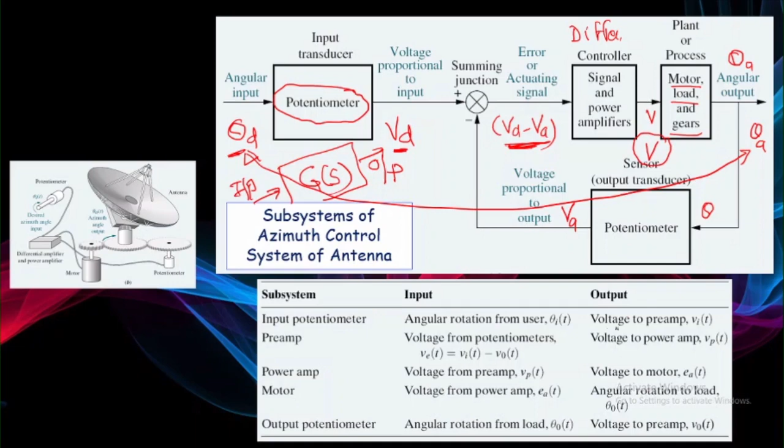These are the input parameters for it, and this is the output parameters. But now if you put these equations, this is nothing but an equation for your potentiometer, this equation for your preamplifier, this is for power amplifier - you can just observe these equations. This is nothing but a representation of the behavior mathematically of your particular subsystem. And this is a motor load or something.

Here you can say it is second order because it is S into S, which becomes second order; this one is first order. This is a simple constant and kind of things. So we got so many blocks into this.

Obviously these blocks need to be clubbed together to know the relation between the actual angle change and the input change. If my overall transfer function of the system is 1, it is a perfect system, I can say, but in actual practice this doesn't happen at all.

So here you can observe the individual blocks: this is one equation, this is another equation, this is a third equation, and one more equation like this. These equations should be clubbed into a single equation, and that is what is called block diagram reduction. We do block diagram reduction.

This reduction has one most important rule: that signal strength should not change at any moment of time. That is basically the intention for it, and we can do this in a step-by-step process. We get only one single transfer function which represents the behavior of the entire antenna, starting at the input potentiometer to the sensing potentiometer. This gives the output signal, and this is my input signal - the relation between these two is represented.

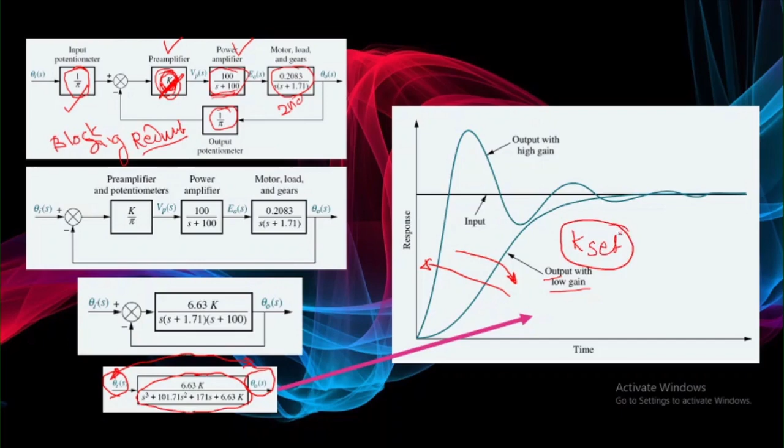If I increase the value of k, that is a gain value I can say, my system is going to perform in this fashion. And if I reduce this, my system will behave this other way. So whichever desired response you want, based on that you can set your k value, and that is nothing but your control parameter, which is going to give me perfect control onto the system.

That is the reason control system, or mechatronics, has importance, and its analysis is most important, because in this analysis everybody's contribution plays a very important role. Motor contribution is there, gear contribution is there, power amplifier contribution is there - each and everyone is contributing. If any of this fails, your system is going to fail. So that is one case study for this.

Similarly, if you look into another case study, there are free swimming submersible vehicles, which are unmanned - no one is there to control that part. In that particular vehicle, the depth of the vehicle is to be controlled. How is it to be controlled?

If you imagine your submersible vehicle, this is my liquid level and this is my submersible, it is moving further, and when I want to go into the deep, this is my desired actual signal, and I want to now move that submersible to the lower side.

What do I have to do? I have to rotate this particular submersible about a certain axis, and that is called the pitch axis, which occurs during forward motion via the elevator surface.

This elevator surface on the vehicle is to be deflected by a certain selected amount, and then it will go and deep dive into the liquid. The angular deformation caused by this deflection will cause rotation about the pitch axis, and that pitch axis will go into the disc.

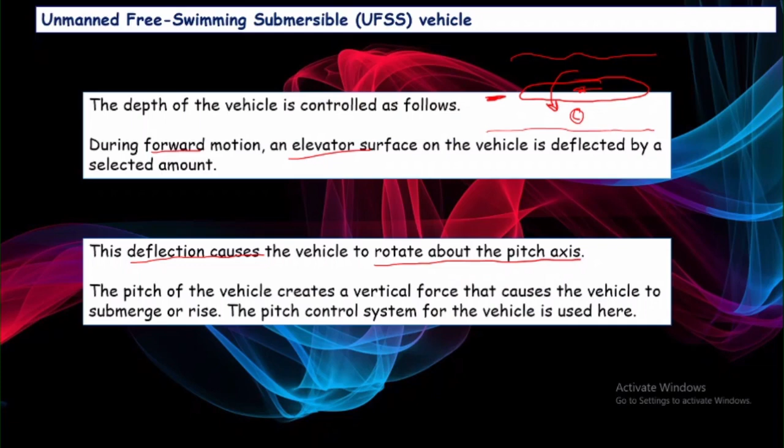For that purpose, we need a certain block diagram representation. Let's look at the test case for this. This is a submersible, and here it is a rudder.

This is called a rudder, and it is to be deflected such that it causes the vehicle to dip down or rise up, whichever altitude is desired. If you want to go up, it will take this angle.

So if you look into this, this is nothing but a heading command we are going to generate. This heading gain is one gain you are going to tune up, and then there is an actuator. The rudder actuator has a mathematical equation like this.

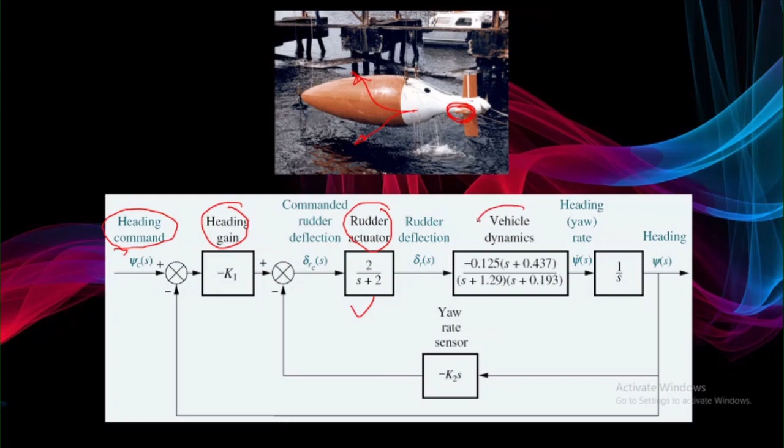Then this is the vehicle dynamics, which plays an important role because it involves its own inertia, its own stiffness, and so many parameters.

So in the vehicle dynamics, you may remember there is a signal convention: the Laplace of a derivative d by dt has value s, and if I have to integrate it, the Laplace of integration will result in 1 upon s.

This tells me the rate, or derivative, of that particular signal. But I want an angle, so we take 1 by s multiplication, which results in the integration of it, giving an angle.

So this gives only the rate of change of angular motion. This will give only the rate of change of angle, and that is what an angle is going to tell you.

And here again you are going to take a derivative, so it will determine a rate here. This is an angle given as input, and this is going to give me a change in the angle, or rate of change of angle.

So in this way you can look into these blocks, and each and every block is contributing to the performance of your system. Ultimately your aim is to connect these two elements, the starting point and end point, and each one contributes to the performance of your system.

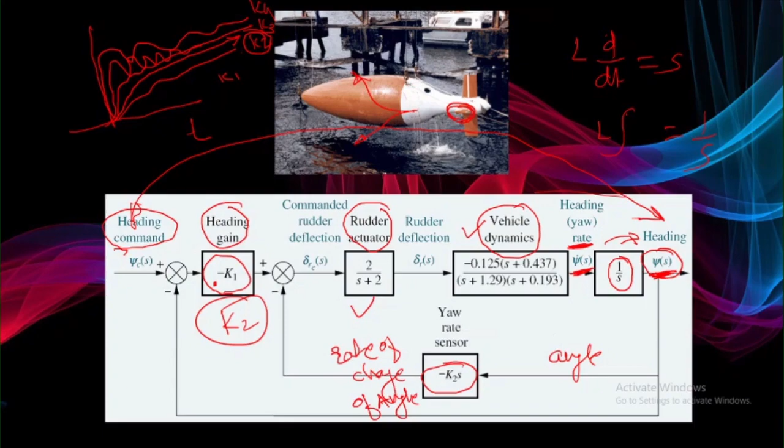So this is the way a control system is to be designed. In a similar fashion, you can have a space shuttle pitch control system, since we now have some basic idea about it. The same way, the pitch of the space shuttle will be controlled to change its attitude.

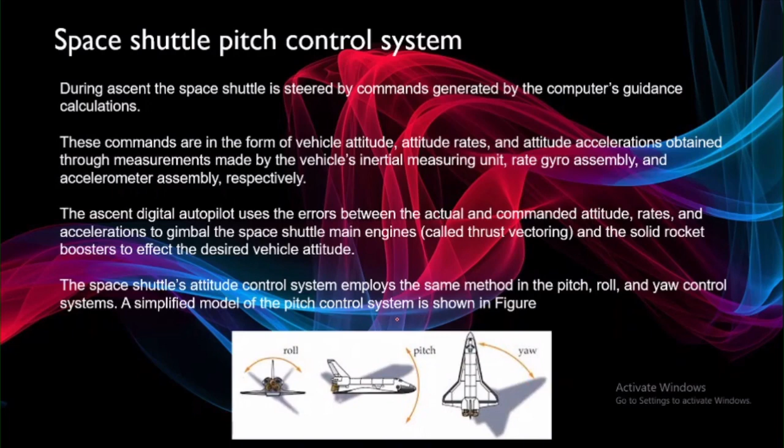In this case, the same way we can see so many blocks are there, and these blocks are interacting with each other. Here I will have two parameters now: K1 and K2. So these two parameters are now going to drive my entire system.

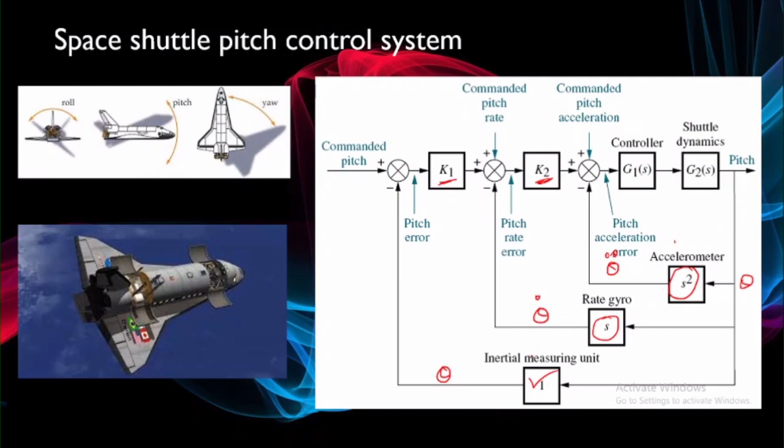Here I am going to control the accelerometer. I am taking S square, and it is on a rate. This is a kind of an inertial measuring unit, so this is going to tell me a theta input. Here I am getting theta double dot, then theta dot, and again here as theta. So this is the way we used to do this.

In a similar fashion, if you look into human control, the same manner this entire control is going to happen. So when we sense any object by our eyes, it is going to sense that object, that is a position it is going to sense. That is given to your brain, because your eyes are nothing but working as a sensor. They are not contributing anything; they are going to collect the information and send it to the brain. And when they send the information to the brain, it will cause a certain delay.

Whenever we are going to design any control system, you need to take account of the delay from one place to another. When we are going to process the information, it is expected that we need to take account of the delay of the sensor. Then that is what we call the sampling frequency or something, we can just look at it.

Then this brain is going to give the signal to the nervous system. Once it processes that the brain observes I want to pick up the glass of water, it will process it. Your brain is fast enough that once it is sensed, it automatically generates a signal for your muscles, and that muscle signal is passed through to the muscle through the nervous system, and that nervous system will generate a chemical pulse, and that is going to give a muscle, and then the muscle is going to act, changing the position of the eye.

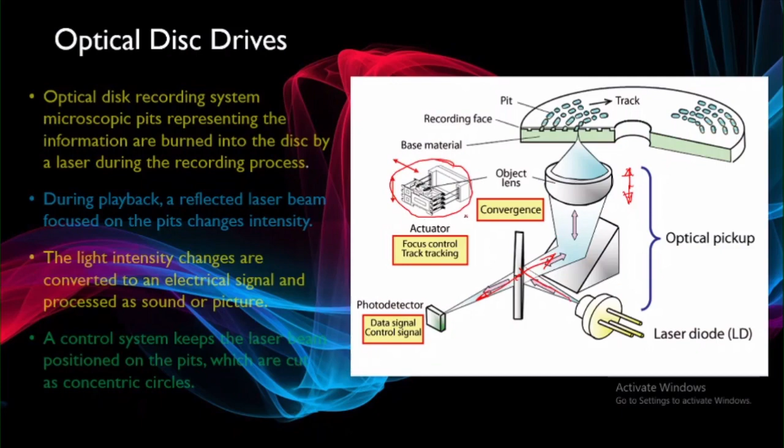If you look into this picture, this is the head of the mechanism. If you press this lens, it will give a very small motion, hardly 1 or 2 mm motion, and that is possible by having two types of control on this: one is tracking control and another is focusing control.

Focusing control means I can have two tracks, like you can just look at here. So here it is a land which is going to change the signal, and it is again going to do this. Whenever the change happens, you can observe my signal value is 1, and rest of the places my signal value is 0 here.

And here it is again, changing the signal means it is going to change the value. So this way it is going to sense what information is written onto the disk. And here there is a motor which will run at a constant speed. The disk you are going to mount here is continuously rotating at a constant speed, maybe 3000 or 4000 RPM.

And there will be two tracking information. One is called coarse tracking, and there is one more tracking that is going to happen within this, which is called fine tracking.

And whenever we are driving in a vehicle and your CD drive is running, sometimes you may observe suddenly your song changes or shifts. This is because of any jerk coming on the CD drive. If your CD drive is continuously under vibrations, this entire dynamics will play a very important role and it is going to miss the information.

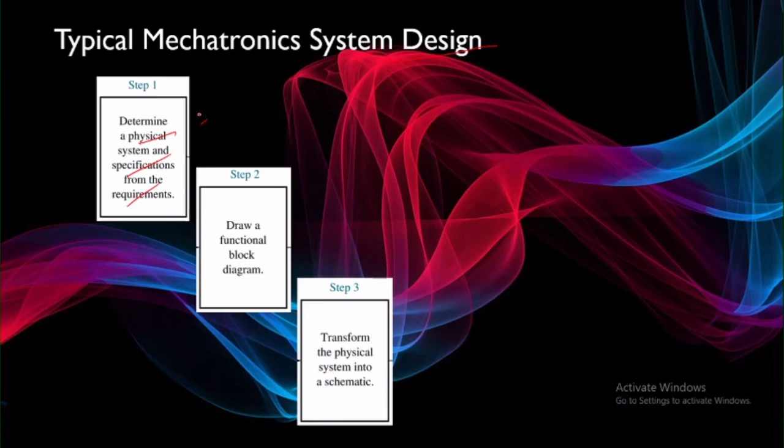Second step: draw the functional block diagram, which we have seen in a few examples, like the antenna control system, human eye control system, or the optical disk drive system. Each block is then analyzed individually, that is, in terms of its transfer function. It is analyzed, and this transfer function is further connected to other transfer functions.

A single subsystem will have multiple subsystems, and these subsystems will interact with each other. Reduce these blocks using reduction methods to a single block and form a closed loop system, and that closed loop system's performance will be analyzed by providing simple signals like a step response, sinusoidal response, or ramp response.

There are so many input signals you can have, like a chirp signal. So many inputs you can give, and you can observe the output. You need to create a relation between your input and output, which is nothing but the contribution of all these multiple small blocks. That is what is called mechatronics or mechatronic system design.

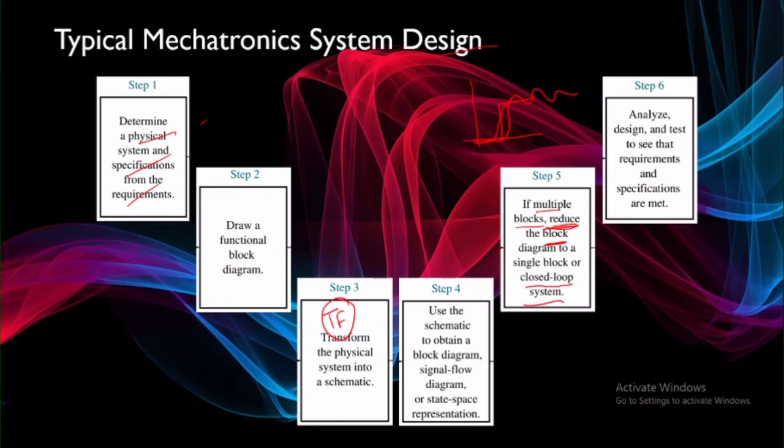And in this, the controller is nothing but a small element, but it plays a very important role. If your control system is not perfect enough, it is going to give a different response altogether. That is what is going to happen.

So we'll now look at the sensor part of it.

Sudhir sir, please wait 2 minutes, I'll be right back. Sudhir sir, can you hear me? Yes sir, yes sir, yes.

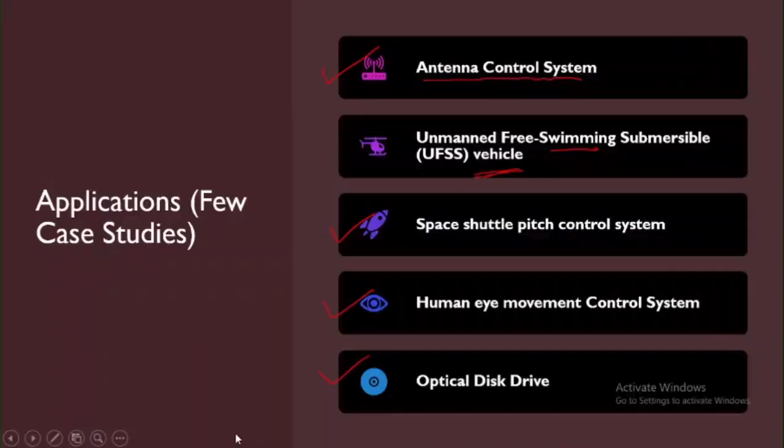Sensors sense easily, and they have their own signal. If I want to listen to something, our brain and our sensors are so smart that they eliminate the rest of the sound, the rest of the noise, and only the information necessary for our brain or our liking is sent to the brain. This happens, and we observe it from childhood itself.

So first we need to sense - in RTD, this temperature is my first signal I want to observe. After this temperature, I will have a certain material which is going to give me a change in the resistance, delta R, and this becomes an electrical signal. That is the principle we are going to use for sensing it.

Which principle are we going to use for sensing? Change in resistance is the principle. Here we got a change in resistance, and that change in resistance I now want to further convert into voltage.

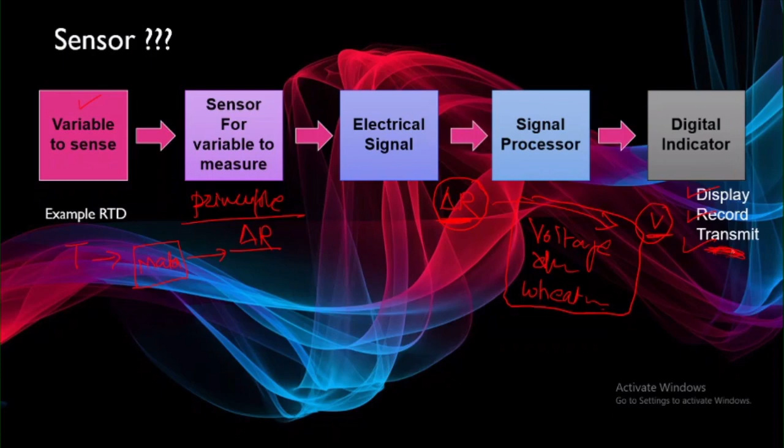This is where we can use multiple circuits - I can have a voltage divider circuit, or a Wheatstone bridge. Many other circuits will give me a change in resistance equal to a change in voltage, and that voltage is either displayed, used for recording, or nowadays, for IoT, transmitted to a Wi-Fi unit.

When we look into the data acquisition system, there are two ways by which we can do data acquisition. One is the signal coming directly and being dumped into the PC, but that would require your PC to be an analog computer, which is not possible. So this is about the physical phenomena which is going to change the particular variable.

Whenever we observe change in temperature, along with that, humidity is also going to change - many parameters change together. But we want only one single variable, yet our brain and sensors sense both things. That is called fusion - our human brain can sense 2-3 things at a time and separate them. This fusion of a single sense or single sensor gives me 2-3 different simple data points - that is called sensor fusion.

This physical signal gets converted by the transducer, which gives a signal conditioning unit. This signal conditioning unit is typically a voltage amplifying unit, or a current amplification unit - amplification is one thing we do. Another part is we want to filter out the information.

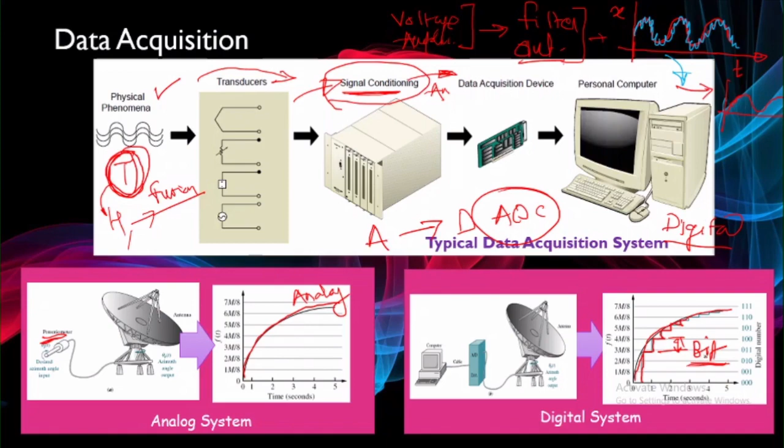Bit information, bit accuracy I can say, and that bit information depends on how many bits you are going to collect. So we'll now look at a simple case within a 2-bit system.

Just take an example of a 2-bit system having 0 volt and 5 volt. Your voice is breaking. Hello? Can you hear me? Sudhir sir? Yes sir, yes sir, somebody says I am not audible. That's what I thought. No problem sir, no problem, everything is okay.

So if I have a 2-bit system, 2-bit means I'm going to represent the signal only within 2 bits. If I take numbers from 0 to 100, I can have a 2-bit system starting at 00, then 01, like this, up to 99. How many steps can we go? Total 100 steps.

Similarly, if I have only a 1-bit system, that is 0 to 9, I have 10 steps. Similarly, if I have 1000, then I can go for 1000 steps. For a 3-bit system, I have 3 bits for this.

This is called the decimal numbering system, with steps spread from 0 to 9 - 10 steps in total. In a similar fashion, this bit system has only 2 steps - that is what binary does. Whether that signal exists or not, that is what it tells, and it has only 2 steps.

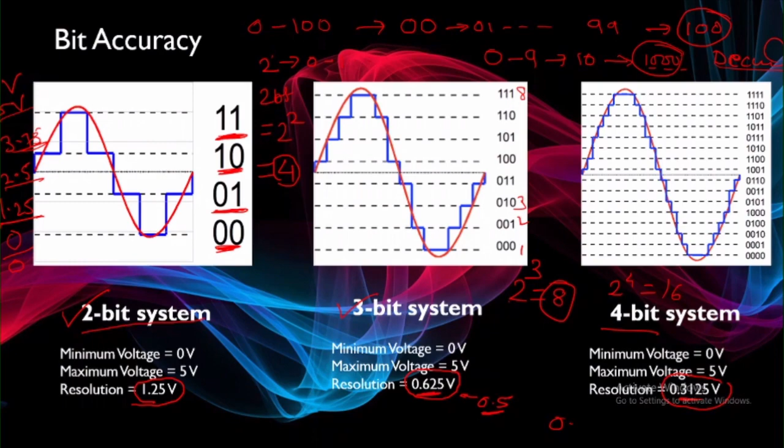We'll have a simple example about it, so how the sensing will be done in a digital system.

So in this digital system, just take an example of a water tank having 40 feet of height and starting with 0 feet. I want to now sense using a 10-bit sensor or 10-bit microcontroller. And this way, the microcontroller does it - 10-bit means the total number of steps will be 2 raised to 10, which becomes 1024 number of steps.

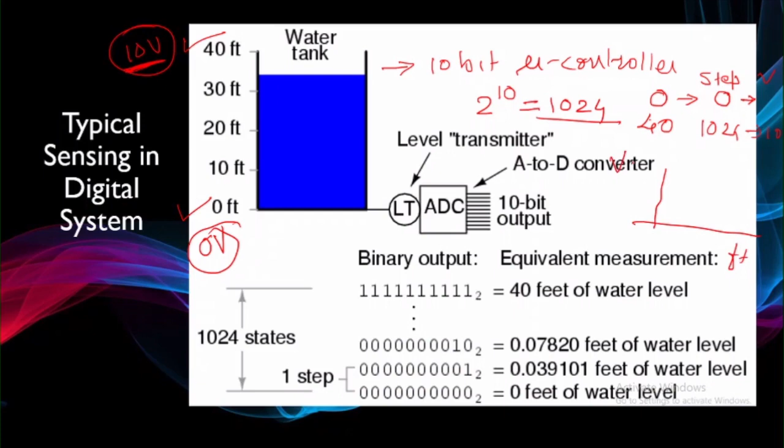So then if I am going to have a maximum position, that is a 40 foot position, my step will be the 1024th step and voltage will be 10 volt. And now we can map it between this. I can have foot on one axis and voltage output on another axis, and this is my 0 position and this is my maximum position. This gives me 1024, and this gives me 10 volt, like this.

So this way we can map it, and I can quite easily sense any in-between step. So for this particular sensor with 10 bits of information, it can sense a minimum of about 0.039 foot - it cannot sense below that. So that is the limitation in all digital systems.

Along with such limitation, digital systems have a very nice advantage - they can remove noise quite easily. You may remember old radios where we used an entirely analog system, so whenever we tuned it, it created so much noise. But nowadays, when I press a single button and tune it, your FM or radio gives you very clear information, clear sound, which was not there 15 to 20 years back. So that's what this is, the digital era.

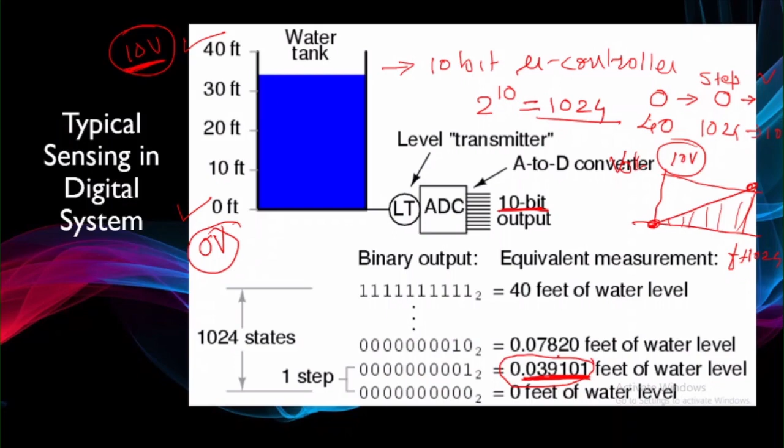So obviously you're going to convert that information into digital, and that is the advantage we can use in digital systems. You have seen conversion of analog to digital, and the same way this digital output will again be converted into analog information. That is what a D to A converter does.

This is what happens in a simple speech kind of thing, a mic which will, as I speak or talk, vibrate, and these mic vibrations will be converted into voltage, and that voltage is again converted into digital information and processed through the computer, and then I want to generate that sound also, and that is possible.

This digital information again needs to be converted into analog, and that is what DAC does, digital to analog conversion. And that digital to analog conversion is given to your speaker through a certain amplifier, and it is going to create a larger sound. So that is what happens.

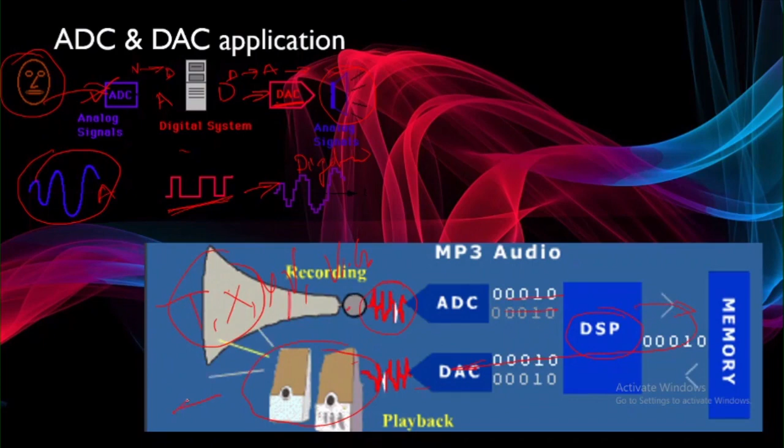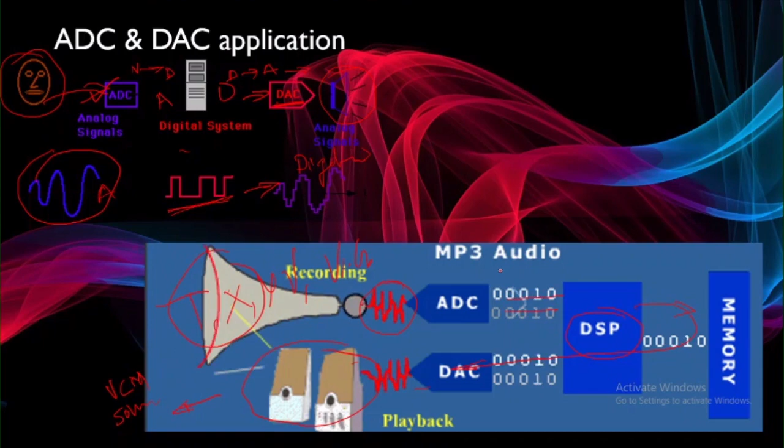Instead of this mic, I can now mount a temperature sensor, or maybe a position sensor, X position, Y position, velocity sensor, vibration sensor. So many things I can sense. And here instead of the speaker, I can mount an actuator, maybe a voice coil motor, maybe a solenoid actuator. So many things you can do, and you can do an entire control of it. That is what we can do here.

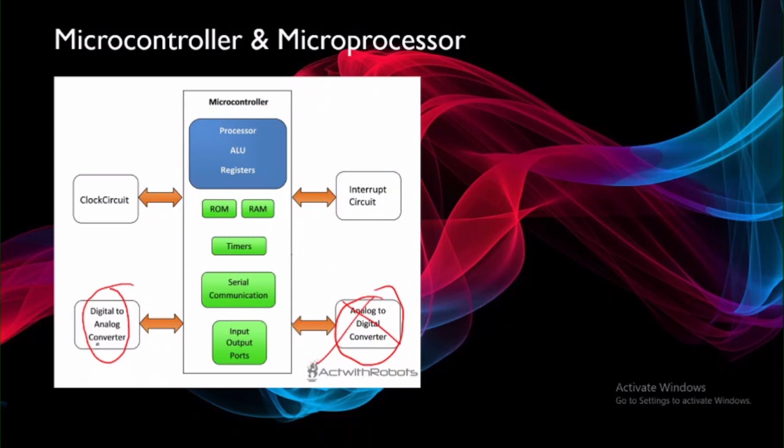There is basically a big difference between microcontroller and microprocessor. Microprocessor is what we use in a computer, works as a microprocessor. It can help you do many complicated calculations, but a microcontroller will not help you with that. In a microcontroller, the most important stuff is the DAC and ADC part of it. So that is what it does. But in a microprocessor, these things will not be there. They will have all the units as it is.

So there will be a RAM, a ROM, memory, timers, serial communicators, and these serial communicators are connected with a mouse, maybe a monitor, and so many things. So that is what it does, and it has a clock circuit which continuously runs. There is a reason for this clock circuit, because whichever signal we take from the sensor comes in at a certain speed. This microprocessor, as you know, every real life system has a certain limitation, and that limitation is the maximum speed at which it can collect information, and that is called sampling, how much sample it can sustain. For that purpose, there is a clock circuit, as it is called.

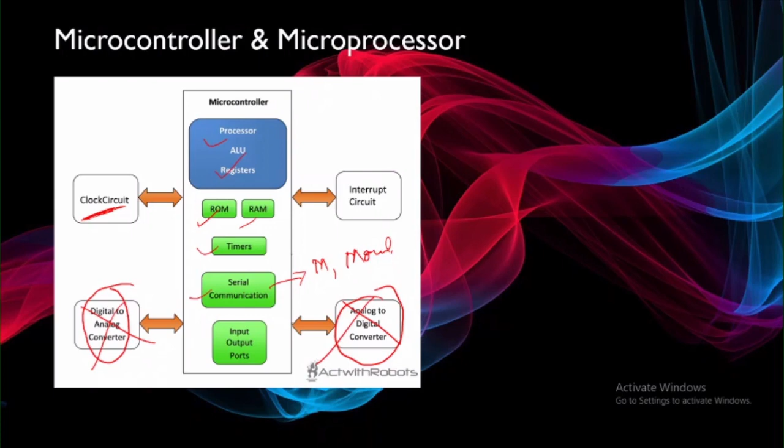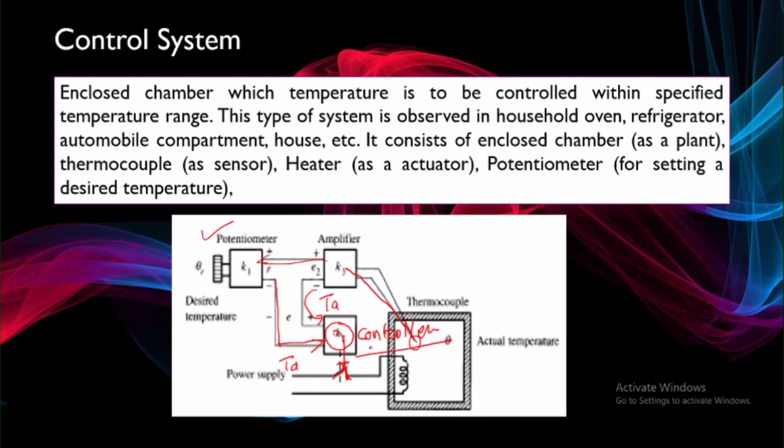It will take the difference of it and give the signal to the power supply, either switching it on and off depending on what is my desired temperature, whether it is a higher value or lower value. So this is the way this controller works, here only on and off. This is typically a controller which decides the behavior of my system. This controller will decide the behavior, not any other part of it.

In similar fashion in class also we used to do this. We used to collect the students in a group, maybe 4 students are there. One is better in mathematics, another is better in experimental part, third person is better in management. We take help of each and everyone, and we, as a controller, will assign them activities. The same way here also it works, and that is what in a control system.

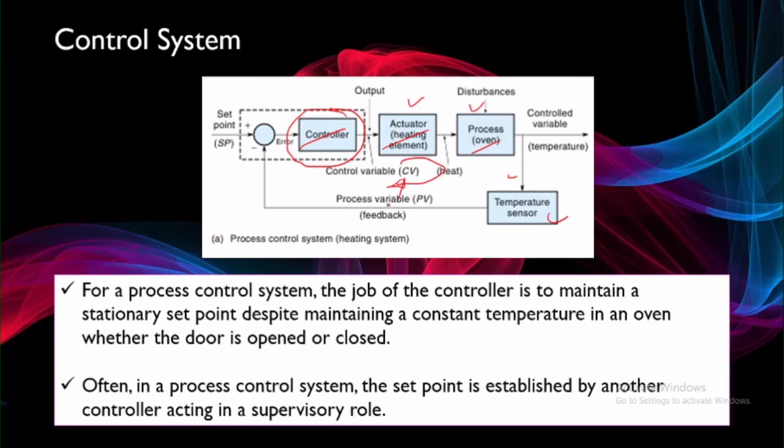So basically, when we are going to design a control system, there is one controller, and another thing is its performance. So if we take an example of 2 persons who have designed a controller, I want to know whose controller is better, that is what is called performance. Who is better, which gives better, and for that purpose we will give a step response to it.

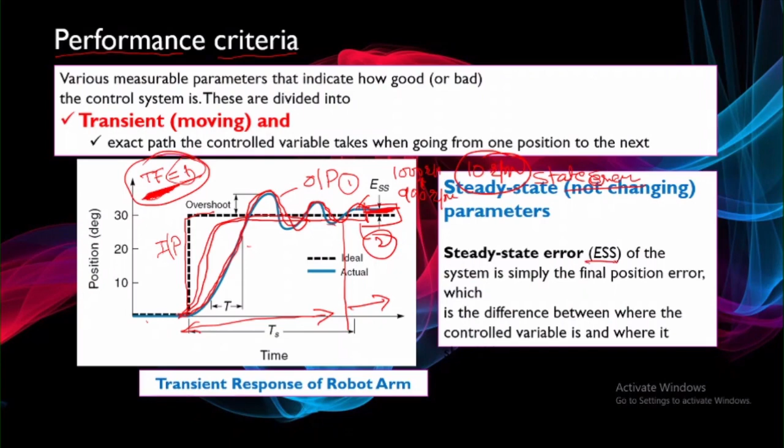So we'll take this steady state error, and when you are going to compare any controller, you need to compare with a few parameters, like how much amount of overshoot is there, what is the amount of steady state error, what is the amount of rise time, and how much time it takes to settle down all the oscillations. All these parameters are very important whenever we are going to design a controller, as they tell us the performance of the system. Whenever we are designing, we are going to look at these parameters in more detail.

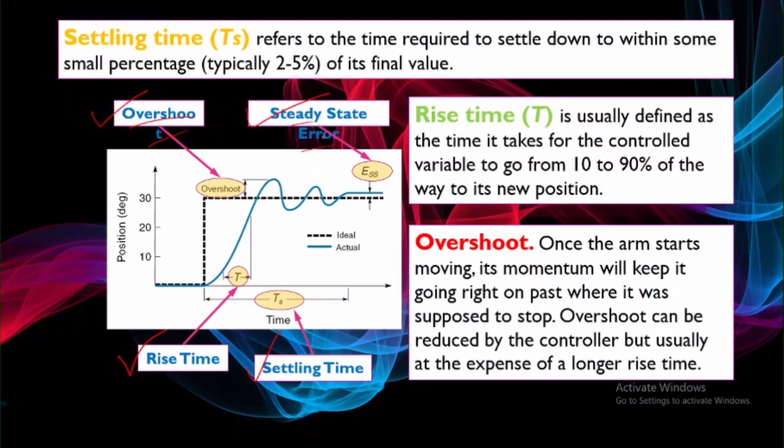But we'll take a simple example, we'll discuss somewhat a proportional controller, and I'll wrap up my session. So when we say proportional controller, we are having a set point here, maybe an angle, I decided 30 degrees as an input angle. Here the angle of the arm is initially 0. I want to reach 30 degrees.

So this is 30, my desired theta angle. This is what I can call the desired angle, and this is my actual angle, sensed by my sensor, a potentiometer. This is called the process variable. You can look into books for different names for different values. I can have an actual signal and a desired value.

It will take the error between these, and this error information is given to the controller. If my error is 0, this becomes 0 and my controller will not do anything. It will keep as it is, it will never change your system. If my error is something, then my controller will act. The same is true with our human active system also.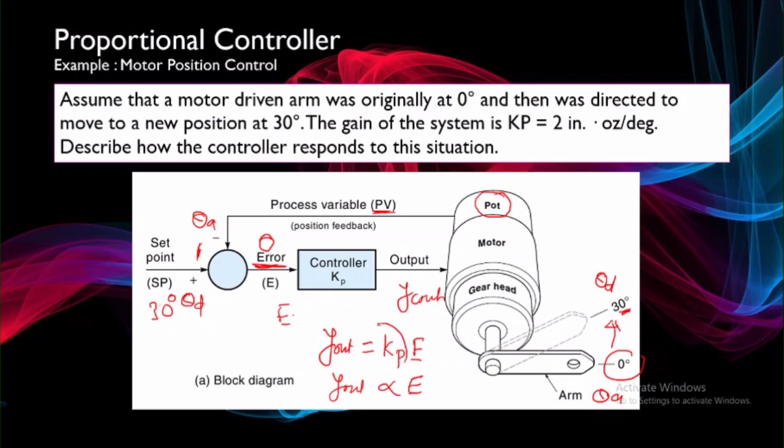So controller takes this error information, and this is the output of my controller, which is proportional to error. Y out is directly proportional to my error, and that constant is the proportionality constant. Now we can see the performance of it.

If my angle is at 0 degrees, my error becomes 30 degrees, and my controller signal will be very large. Just imagine it will be very large. As the angle progresses, this controller signal can be 60.

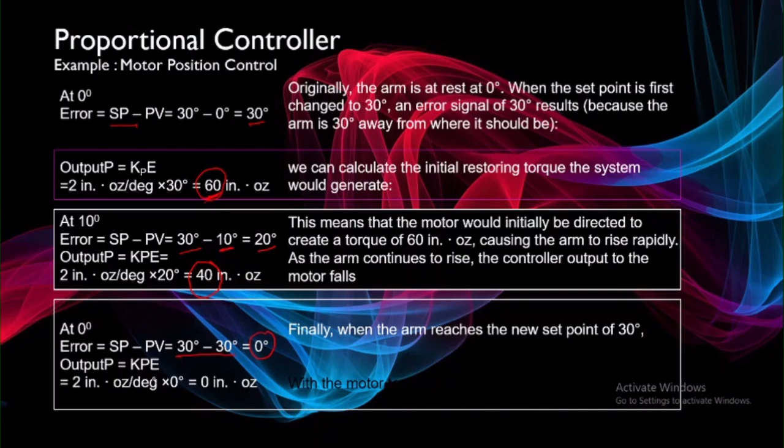As my arm reaches 10 degrees, the error gets reduced to 20 degrees multiplied. Previously it was 60 as an amount of force, here it is now 40. Then as it reaches 30 degrees, the error is 0, and Kp into the error results in 0 angle. So you can look into the plot like this.

Initially this is your set point, this is my previous process variable or actual position, and between these two is nothing but my error. If you look into the control signal, initially the control was 0 because no signal was given.

Once I give the signal, wanting to reach 30 degrees, immediately the force will reach 60. This is the amount of force it generates. As time progresses, the error goes on decreasing, and it reaches 0, and as error becomes 0, this becomes 0. With lower gain values, I will take more time to reach this point.

Again, if I reduce the gain further, it will behave this way. If I increase the gain value, it will be faster. So that is how the proportional controller behaves with proportional signal.

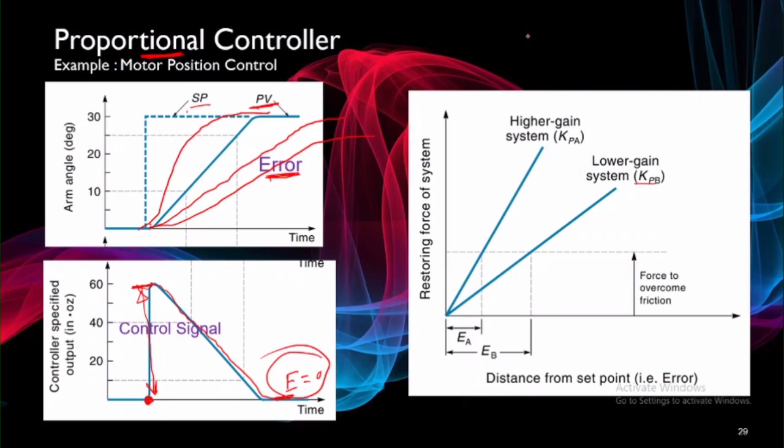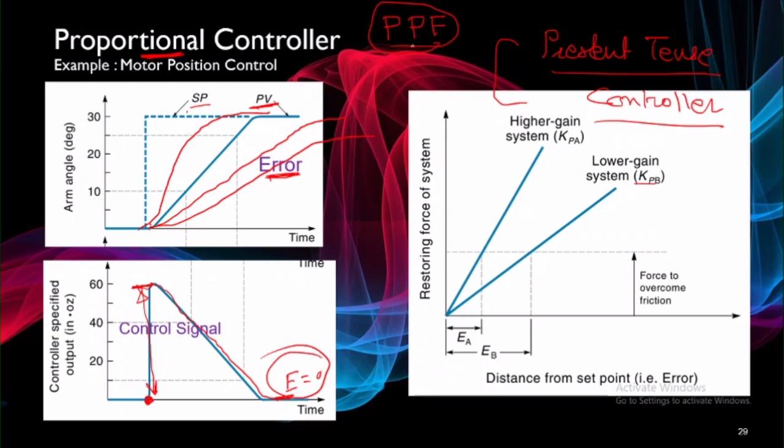Actually, the proportional controller is also called a present tense controller, because it takes account of the present into the system. Tense is most important, because as human beings, our entire world works into three tenses: present tense, past tense, and future tense. I can have these three tenses, and based on that, all the time we give reactions like this.

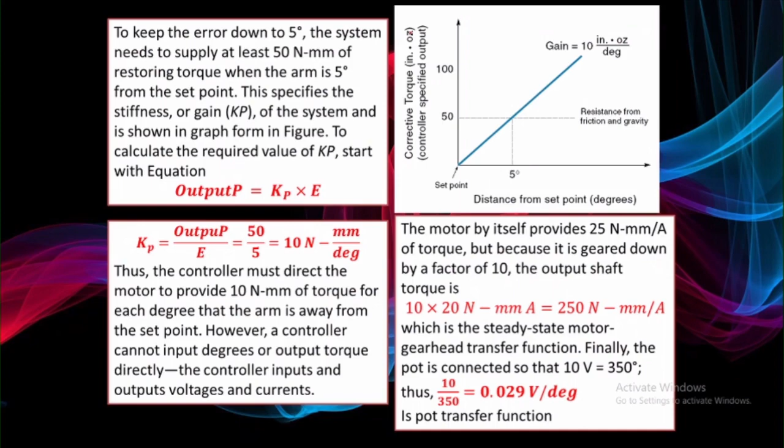So this is about steady state analysis, which I will skip and directly move towards the next part: the integral controller. In the integral controller, we take the integration of the error. Previously, in the proportional controller, the output is directly proportional to error, so output of proportional controller equals Kp into E. Now we are going to look at the integration of this error, and what that integration tells you. My error with respect to time may look something like this, and I am going to first integrate it.

Yeah, may I interrupt? Yeah, you can, continue a little bit loudly. How much time do you require to finish? Maybe 15 minutes, 10 minutes will be enough. Okay, so accordingly we will arrange the next session by 12 o'clock. Okay, thank you. So am I audible now properly? Yes, yes, speak a little bit loudly. Okay.

So here, you can observe the variation of the error with respect to time is like this.

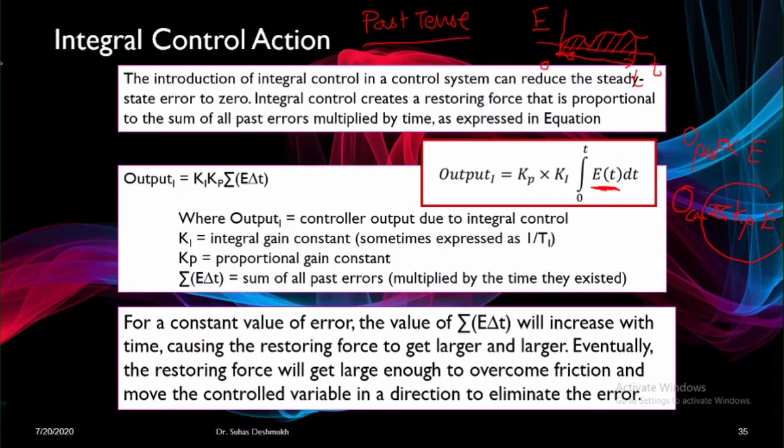When you integrate from this time to this time, it means I am going to collect the information of my system in past tense - that is what it represents, past tense information. So why do we need it? Because whatever the performance was previously, we should know it, and based on that we are going to take an action into the future. That is what the integral controller will help us do.

So let's take a simple example, the same example, and we'll do it. Previously we reached the 30 degree angle of this arm. Now we'll put a weight onto this. When we put the weight, what is going to happen? Whatever zero force was acting here, once we put this much amount of force, it will get lowered down.

How much amount of lowering down will happen? That depends upon how much load you are going to apply. If I say 40 amount of force I am going to apply, it will convert into a 4-degree angle, so it will lower down your arm by 4 degrees. Now your desired angle is 30 degree, and your actual angle is now 26 degree. Now both controllers will start working, and that is how it works.

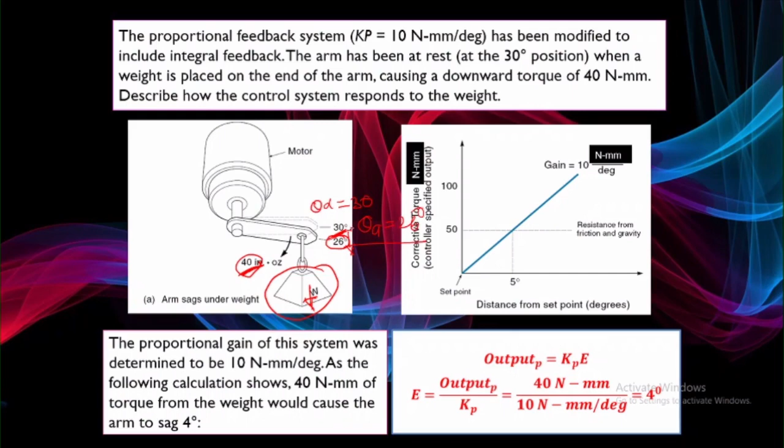Just look at it here. Initially your angle was 30, it is lowered to 26 degree. So this is nothing but an error signal we got. Immediately once I get an error signal, your proportional controller - this is the performance of the proportional controller.

What this proportional controller will now immediately do is generate this much amount of force, and this is the force generated by the proportional controller, which you can observe here. But up to this point, if you look at the error signal, previously there was no error as such - there is no error envelope here.

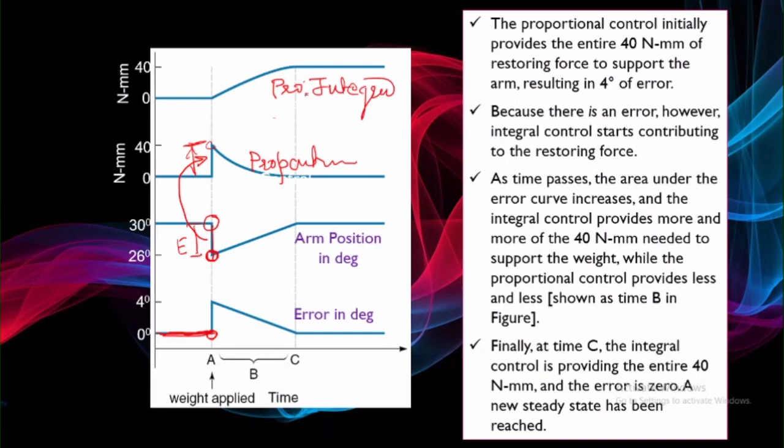So your integral controller will have zero force at this point. As we go on to the next situation, maybe a 2-degree angle, or I reach 28 degree, just imagine - your error has reduced, and the amount of force, the proportional signal or proportional forces, are also reduced.

But it has created some error envelope, and the integration of this particular graph will be done based on that, and this is going to generate this much amount of force - this is what is called the integral force. Then as we progress and reach 30 degree, my error becomes zero. Yes, error becomes zero, but it has created a certain error envelope, and this error envelope will now give me complete force - it will pick up this entire stuff, like this.

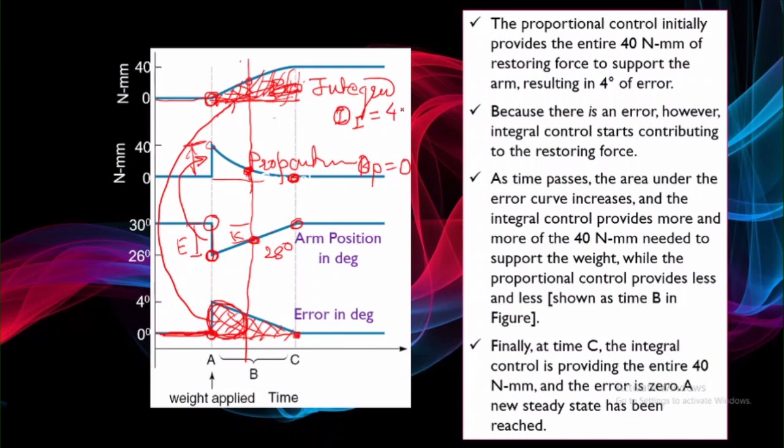So this is what is going to happen, and at the same time you can observe your proportional signal, or output proportional force, becomes zero, and your integral force or integral controller signal becomes equal to the amount of load you put. What this indicates is, whenever you use a PI type of controller, proportional plus integral controller - the proportional controller will only work whenever there is an error in the system, but the integral controller will take care of past information, whether you have put the load or something, and based on that it will work.

So this integral controller has a very nice advantage whenever there is friction in the system - it will take care of it. Whenever there is an inertia load in the system, it will take care of it. Whenever there is a backlash in the system, it will take care of it. So whenever any of this is present in the system, you can use this integral controller, and that is what happens.

So now once we've done the integral part, as I go on increasing more integral, obviously, just imagine I have a force error variation that continuously varies - my integral will have such oscillations.

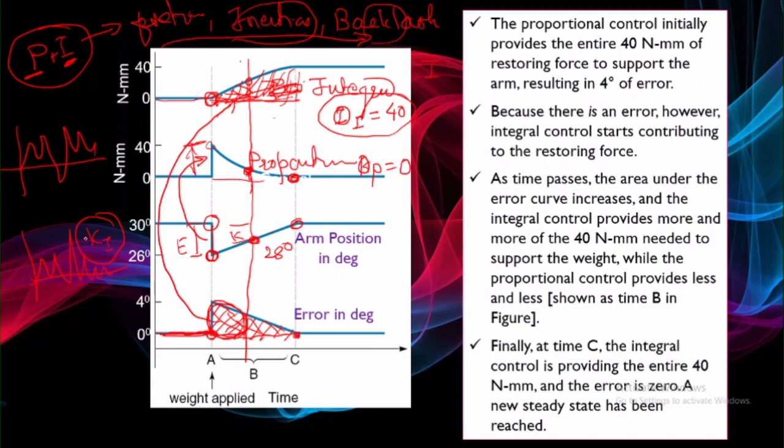As I give a higher value of gain for Ki, it will provide more oscillation and instability into the system. Due to this instability, there should be something which applies the brake for this instability, or stops it if your system is unnecessarily speeding up or creating vibrations. That is what is done in the braking, that is what is done in the proportional derivative controller.

We have seen the output of the proportional controller is Kp into E. The output of the integral controller was Kp into the integration of E. The integral is going to tell me the past tense. This is going to give me the present tense. And only one tense is left over, the future tense, which is done by the derivative controller.

Derivative is nothing but the slope of your error. If my error behaves like this with respect to time, I want to now predict the error. I am at this particular point and I want to know the error at this point. I can take a slope of this and get the value of the error at this next instance. That is what it does, it predicts the future of it. So this is the future tense it is taking account of.

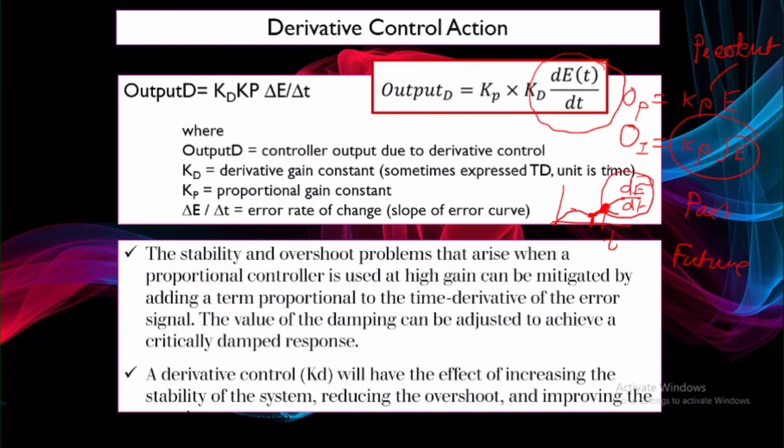If you look at this error graph, you can observe the error is going to change in this fashion, taking positive slopes. Here the slope is zero, then the boosting part happens, it will generate a positive energy. And this is what happens with the braking of it. Obviously the oscillation into the system will get died down.

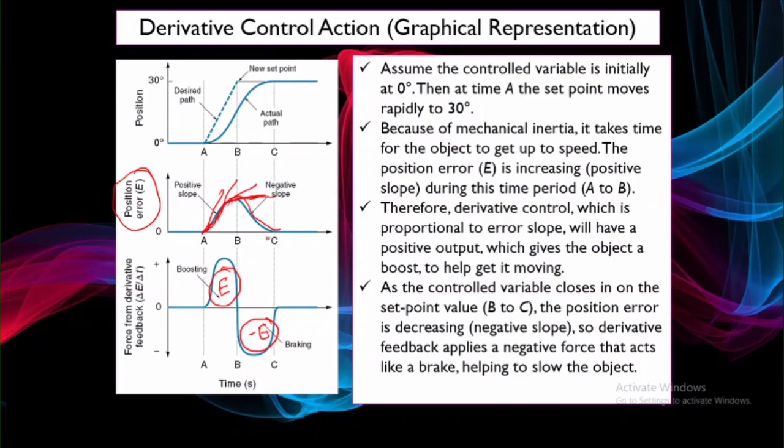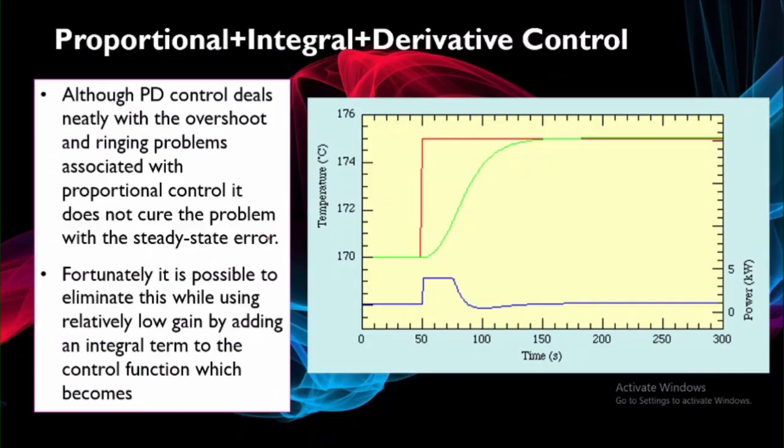That is what a derivative controller contributes to this. It helps to predict the future of your system, and that is what derivative control does for it. When you look into this, you can go through these PPTs, I will share those PPTs for you people, covering proportional, then stability, and then tuning.

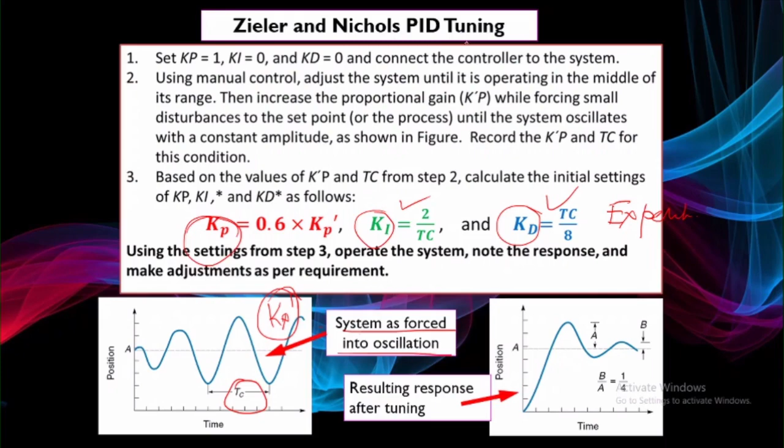Tuning is one technique where Ziegler-Nichols has contributed a lot, and he defined this tuning. In this, he gave an input to the system, and as it increases, the system is going to oscillate something, and that time is determined, and what are the Kp dash for the oscillations, then you can tune up Ki, Kd. This is an experimental part of it. Most of the time it becomes very difficult to set the values of Kp, Kd, Ki, and this is one way by which we can tune up these parameters practically.

So we can take a few examples also, of whenever we are going to select which type of controller is to be used for what purpose. If you have a steady state error into your system, and your error is acceptable, you only go for a P controller. If your error is not acceptable, then there will be a possibility your signal may be having a certain noisy signal.

If noisy signal is there, then you go for a PI controller. If noise is there, and noisy signal is yes and you don't want to disturb it, let it be like this, you just go for a PI controller. If noisy signal is not there, go for a PID controller. Don't go for derivative signal directly.

The reason for this: in a derivative controller, if you look at time versus my error, your signal is having like this, and your noisy signal will be like this. In this noisy signal, all the time it is going to tell me the slope of it. And if I multiply with your derivative signal, that derivative controller may disturb the behavior entirely.

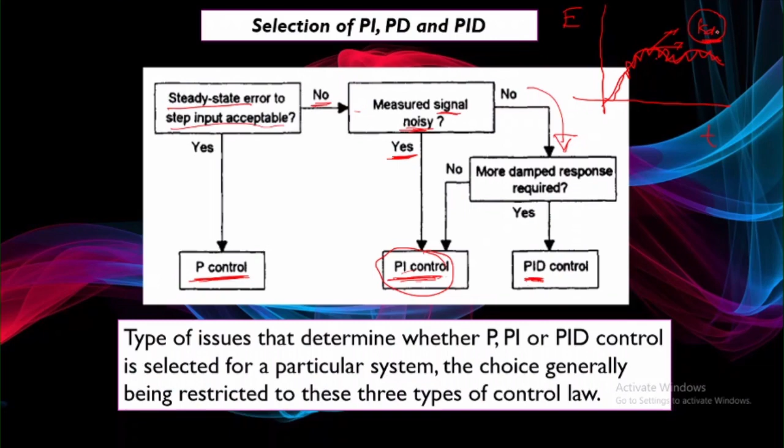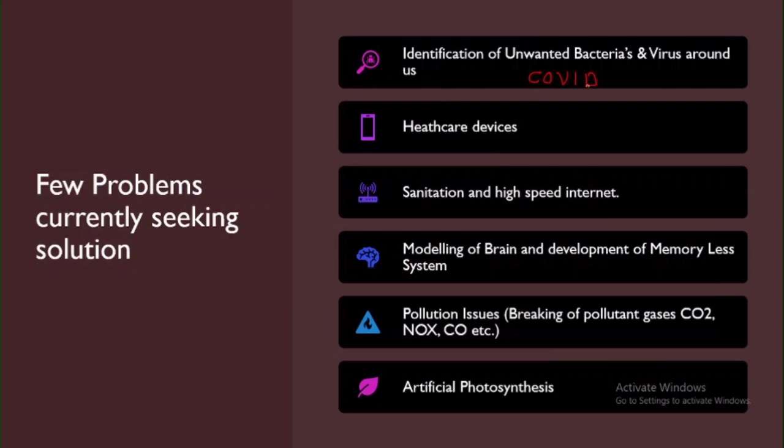Now at the end of this session, I would like to give a few open-ended problems. We are currently facing COVID-19. Can we develop a system which will sense whether COVID viruses are near us? Can we sense it, like in gas sensing or something? This is about identification of unwanted bacteria and viruses around us. Can we identify it? You think on it, you can go ahead with this.

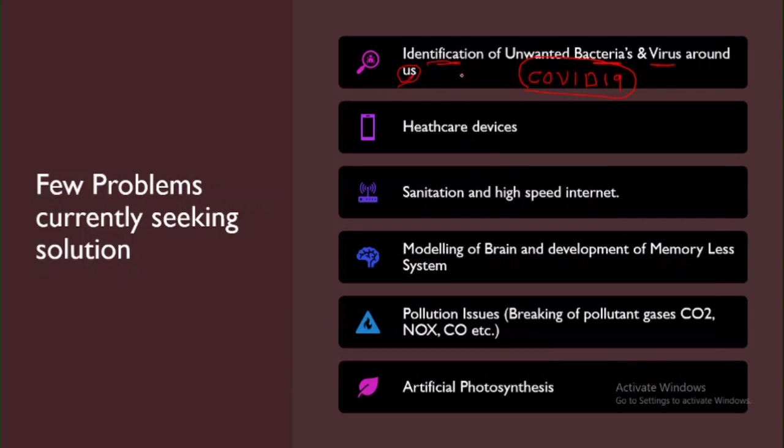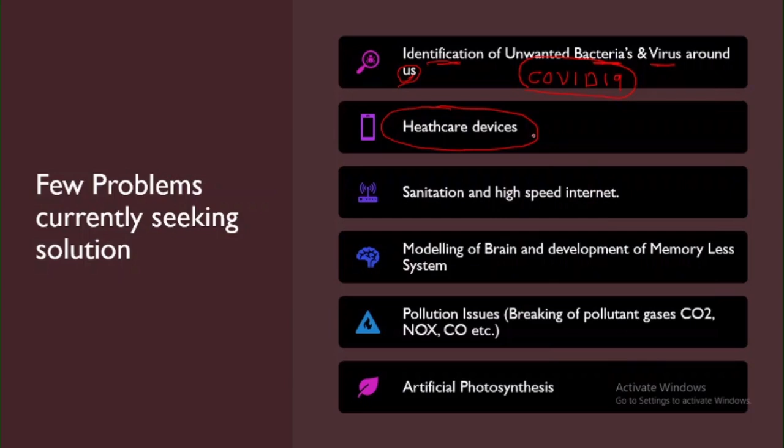Next, how can we develop healthcare devices? Nowadays we can find so many healthcare devices like a pulse oximeter, temperature sensor, and many other things. But still there is a need for such devices at low cost. That is an important part.

Next is how can we have systems for sanitization, and also maybe having high speed internet is another part of it. How can I go for more appropriate sanitization, and know whether my sanitization has happened or not? Most of the time we are worrying whether we are carrying COVID with us or not, and all the time whenever we come home, we take care - we wash our hands, take a bath, and do many things whenever we go out and come back.

Suhas, yeah, sorry for interruption. Our next guest has just joined. Okay, we will have a few questions. Just let me finish within one or two minutes, and then we'll continue.

Go on. So sanitization is again an important part, and that is what we need to do. The most interesting part is modeling of the brain.

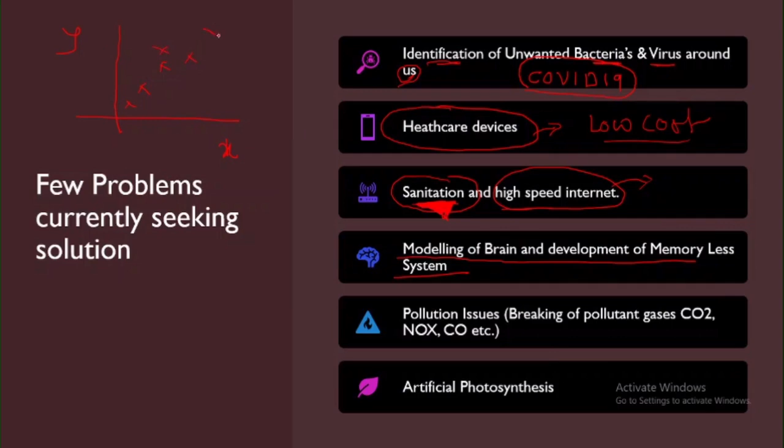Modeling of the brain means, whenever we collect information, as in a human brain, it collects information with some samples. I can say x1, x2, x3 are samples, and this is my y. I will map within two points - for this x1, I got y1, then this other point I got this, all the data points. And we are going to fit the curve with something like y equals mx plus c.

Next time, when I get some other information, I am going to change this angle with some change in the m and c values. All the information from x0 to xn sample data will be stored in these two numbers, m and c. I need not worry about the value of x0, y1, or anything if I know this equation. This is what in simple curve fitting you can find.

Why can't we take the information we are collecting through sensors and fit it into a multi-dimensional mapping? That is what is called modeling of the brain. Can we do something on this front also?

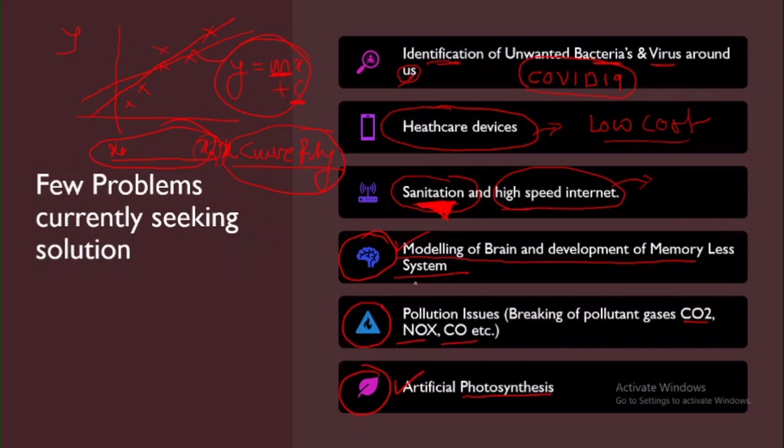The next part is pollution. Can we split up CO2, NOx, CO into different parts? Can we develop a photosynthesis process artificially? That is also one of the areas we can think of working in, and that is where mechatronics or an interdisciplinary approach will help us contribute more to this part.

So this is all I would like to share with you people. I am very much thankful to Sudhir sir, Gowli sir, and all.